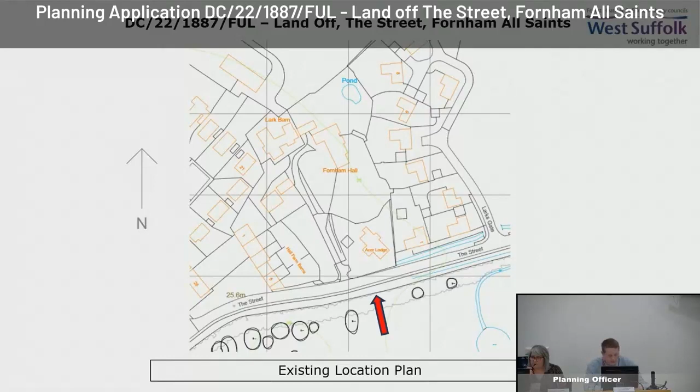This slide shows the location of the access in more detail, particularly in relation to Acer Lodge, which is the bungalow located on the opposite side of the B1106 highway, and the Larks Gate Junction, which is here, and Acer Lodge is here.

The access will be constructed over a drainage ditch using an engineered brick retaining wall. Later within this presentation, I do have a photograph of course, the site, Acer Lodge, and the Larks Gate Junction for context.

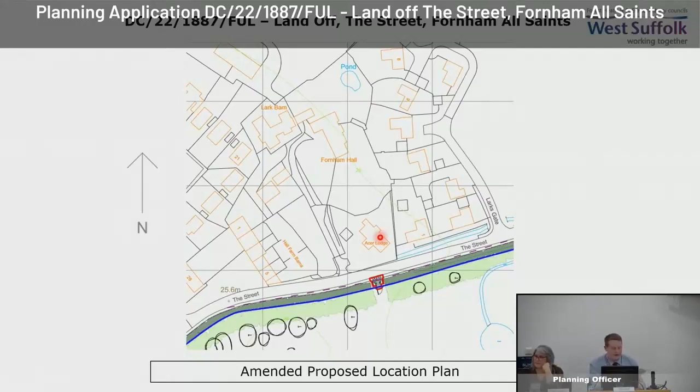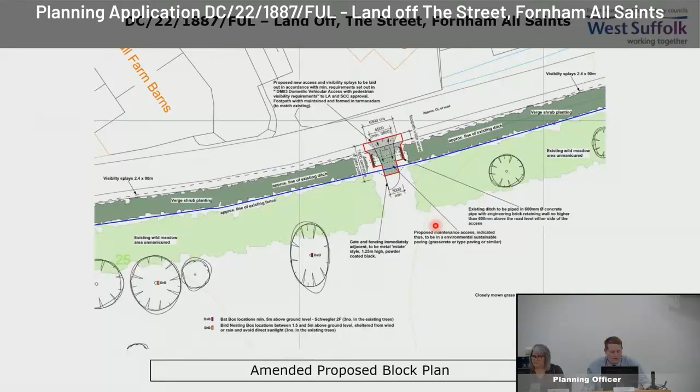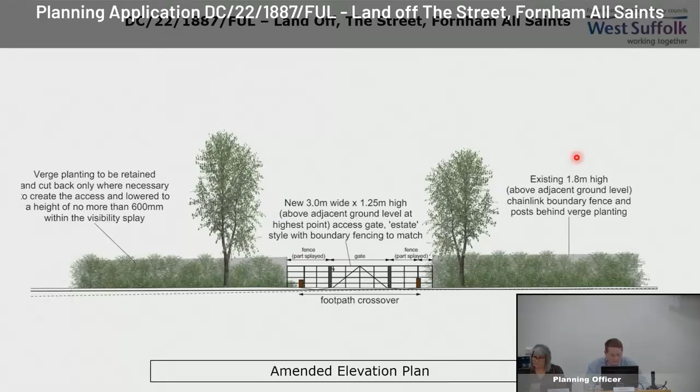Originally, the plans proposed to install matching metal gates and fencing at a height of 1.8 metres. We feel that this amendment is quite a significant improvement and more fitting with the rural character of the area. I also have a photograph of the existing fence later within the presentation.

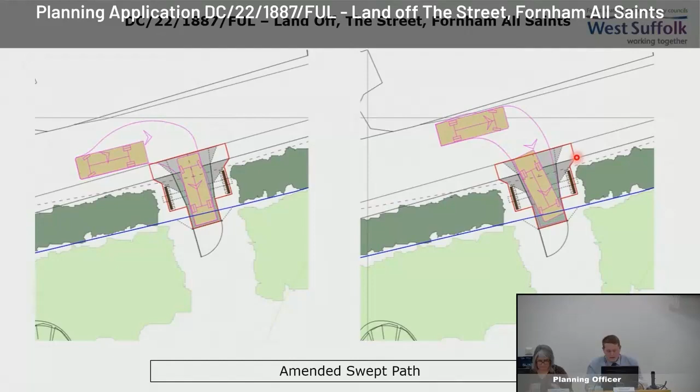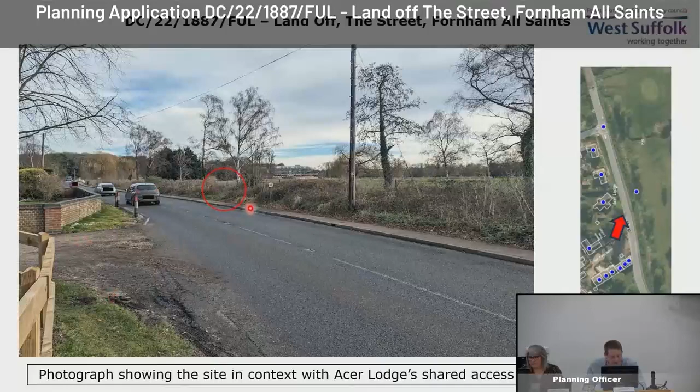This photograph is taken to try and show the site in context with the shared access serving Acer Lodge and other residential properties, and approximately where the access is proposed.

So moving on to consultee comments.

Highways have no objections to this application, subject to conditions which are set out within the report, and they have confirmed within an email that they do not consider that this proposal would result in an adverse risk to highway safety. The Conservation Officer does not object to the amended scheme following the submission of a heritage impact assessment, which demonstrates no harmful impacts upon the conservation area.

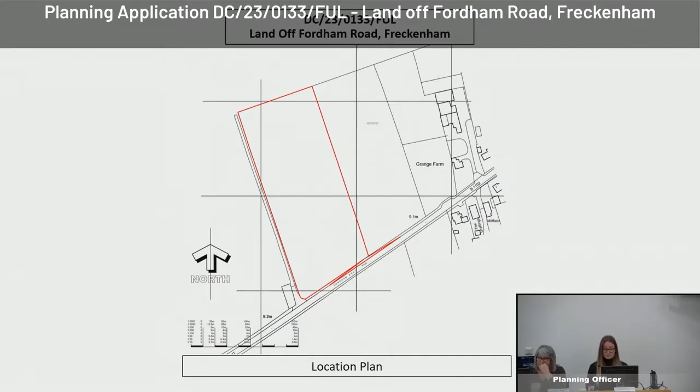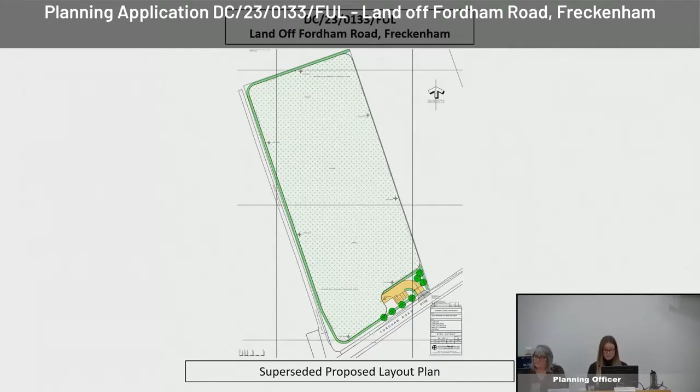And then following the January committee, we have received this amended plan, which now shows hedge planting along the western boundary as well as the north, south and eastern boundaries. We have also had some clarification in terms of the hedging that is proposed.

So it's been confirmed that it would be a native species hedge made up of hornbeam and beech planted in 2 straight rows, set 335 millimetres apart and staggered at a density of 6 plants per linear metre.

It's also been confirmed that the plants are to be open ground stock, 1.2 metre to 1.5 metre high. The beech details growing between 400 to 600 mil a year and the hornbeam between 200 to 400 mil a year.

The applicant has confirmed that they are not proposing any external lighting for the scheme, with use only taking place during daylight hours with a maximum hours of 8 a.m. to 8 p.m. depending on the time of year.

If the application were to be approved, conditions can be added to the permission controlling the hours of use on the site, which is condition 4 within the late paper, as well as not allowing any external lighting to be installed without planning permission being sought, which is condition 5 within the late paper.

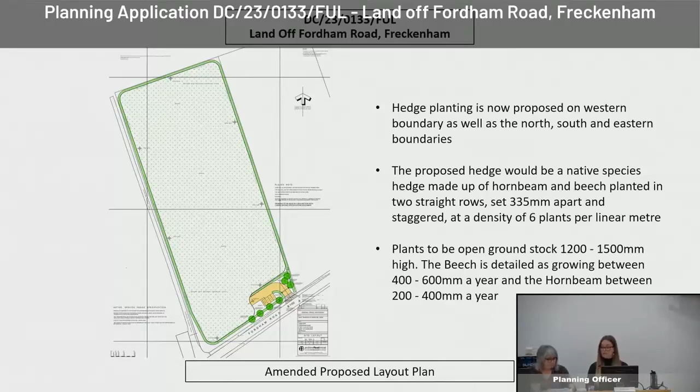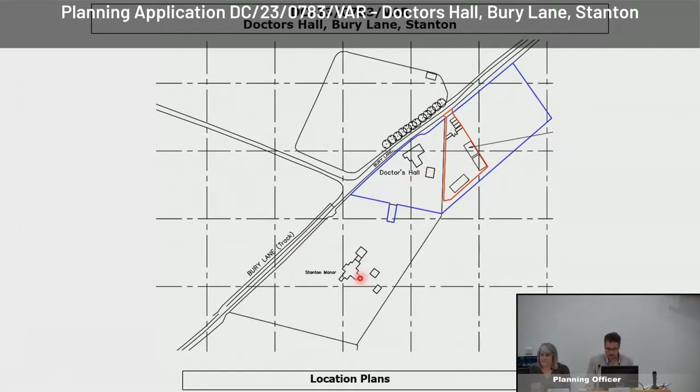And then the site is shown in the red triangle associated with the property at Doctors Hall. Land to the north and the east as paddock is also within the ownership of the applicant. Nearest dwelling is to the south, which is Stanton Manor, highlighted with the laser now.

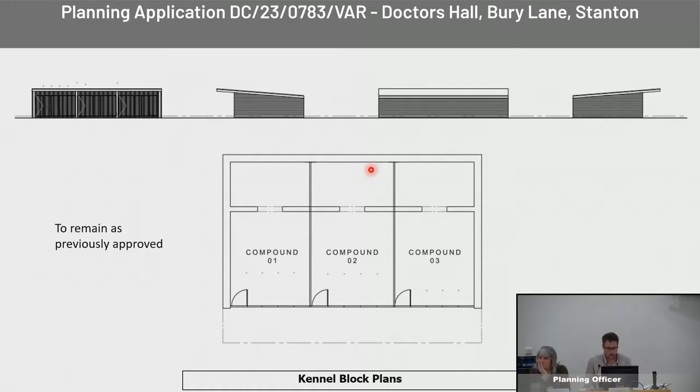This is one of the elevations. Again, members will have seen this on site. This is the kennel block plan, and the amended details as was previously approved for the stable building, and now the alterations to that stable building. Again, the form and position of the building is identical. The only changes are purely elevational.

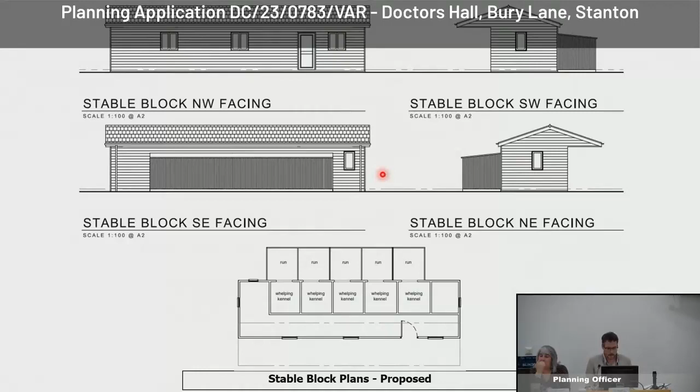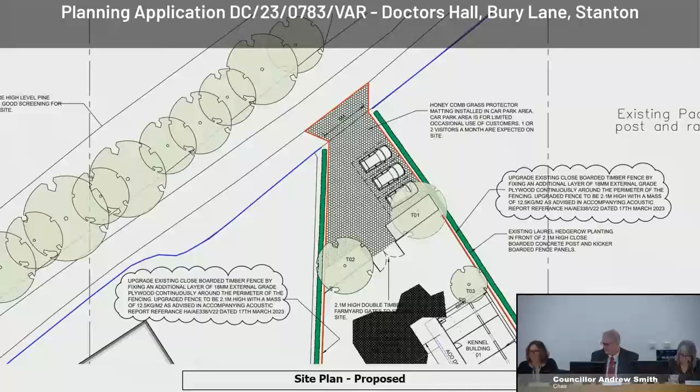And those against, please? And I guess there are abstentions. 2 abstentions. Okay. Oh, Jim's left over here. Jim's gone, yeah.

Thank you, Chair. So that's 10 votes in favour, 2 against, and with 2 abstentions. So the motion is carried and the application is approved. Thank you, everybody. Thank you.

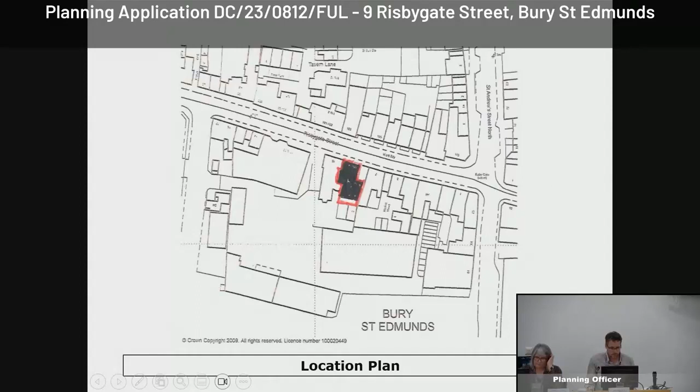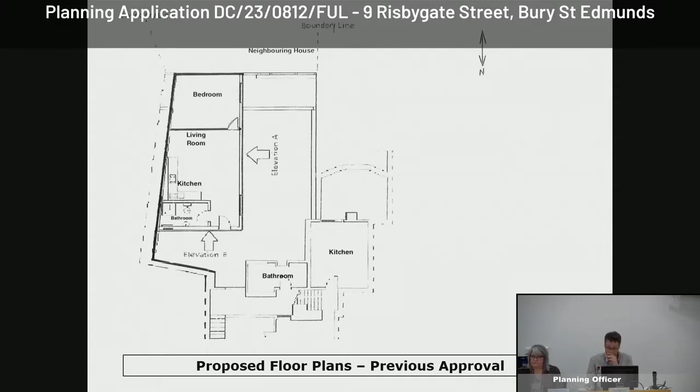Members, of course, will have a good knowledge of this site following the site visit on Monday. But just to talk you through the plans, this is the site outlined in red, located to the south of Risbygate Street. We have first floor plans associated with the previous 2019, now no longer extant, approval, which shows the one-bedroom flat at first floor level, accessed out of an external door across the flat roof and back in. This is all of current flat roof ground floor restaurant extension that was built around 5 years ago.

This gives you a better indication of that existing and current arrangement. This is the flat-roofed ground floor restaurant extension, which members who were on site will note is not visible in the slightest from outside of the site, because the site is surrounded by a relatively high wall and was therefore considered acceptable in heritage terms when it was approved and built.

What we can see on the right-hand side is the previous approval, no longer extant, but from 2020, for the one-bedroomed flatted accommodation with a pitched roof, reflecting, if not completely matching, the existing arrangement of gables and pitched roofs on the rear of the building.

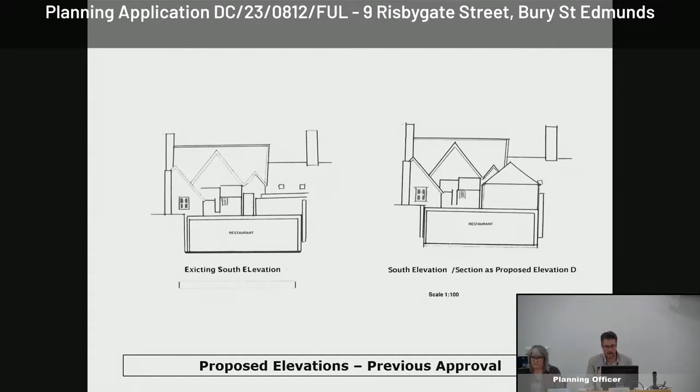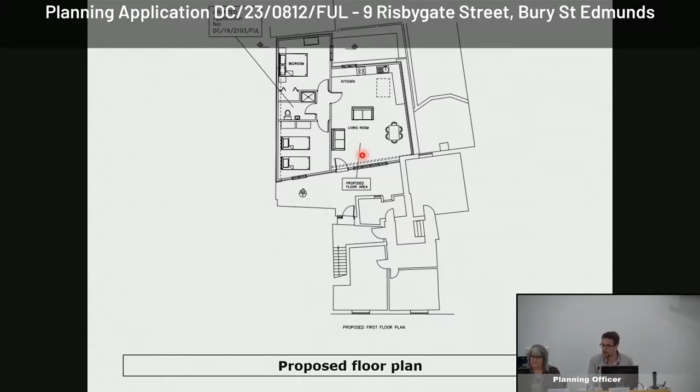We have this element on the left-hand side of the flat-roofed area, as we see on this plan, which includes the area that which was previously containing the single-bedroom flat, and now we have this additional element on the other section of the flat roof, which now proposes in totality a larger unit of accommodation, 2 bedrooms. It is proposed as manager's accommodation for the owner of the business to occupy.

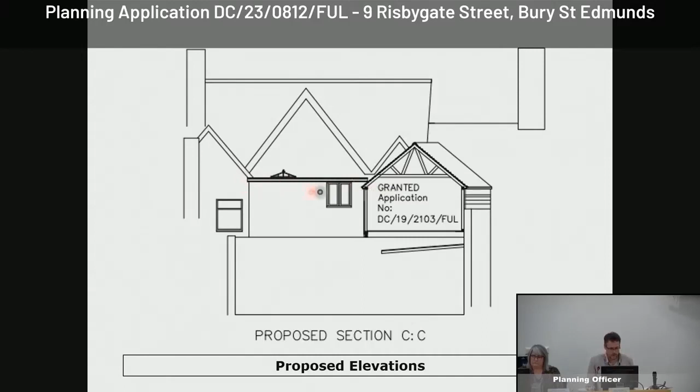So these are now the current proposed rear elevations. We have the section of that pitched roof element, which had previously obtained planning permission, albeit has not been implemented. And we now also see the current proposed extension to that element, which is the flat-roofed section within the centre of the site.

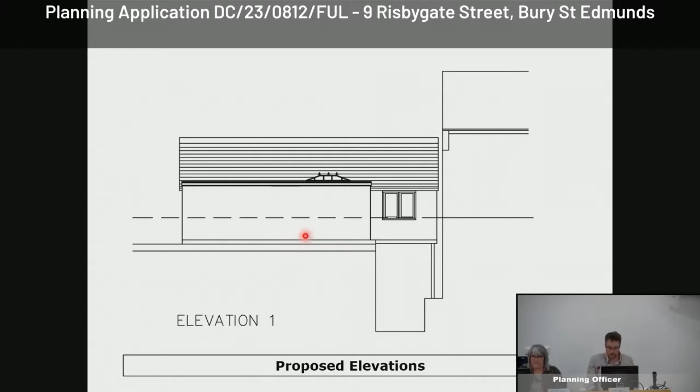The next plan shows an elevation of the neighbouring dwelling. Members will see it beyond the rear wall of the restaurant business. This is the pitched roof element, which is identical to that which was previously approved. And this is the fairly deep flat roofed element, which at first floor level, in effect, creates the impression of a two-storey flat roof extension to the rear of the listed building.

We have one further elevation, taken or shown positioned immediately behind the building itself. If members can imagine where the extract flue was positioned, this is an elevation looking out towards the rear of the site, which shows the pitched roof first floor extension, identical to that which was previously approved, and then of course the flat roof side element to the right hand side.

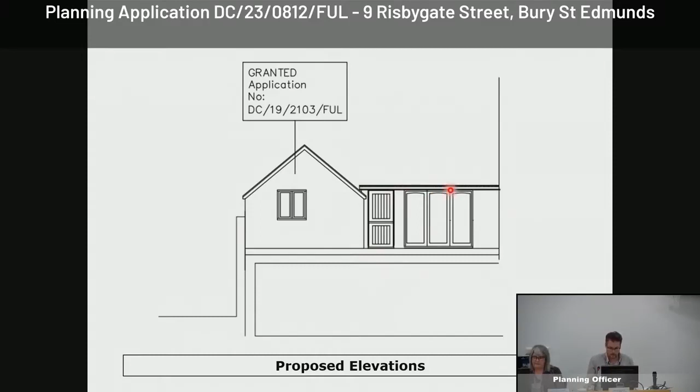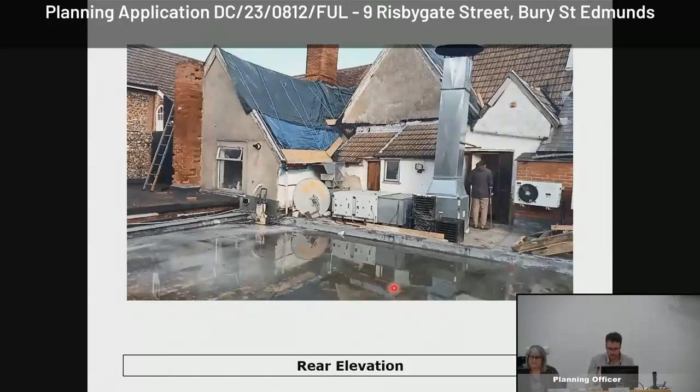I have a site video. It just pans round from the car park and shows the building itself and then the dwelling on the right hand side. And then there is also a video from the flat roof itself.

We can see the very small rear courtyard behind the flat roofed ground floor restaurant extension, again subservient to the scale of the wall. That's the gable end of the neighbouring dwelling. And then we pan round further to show the rear of the existing listed building, and then the retaining wall on the right hand side.

Just in this position here, if members can see, these 2 would appear to be air conditioning units. The pitched roof element of the structure will be positioned in this location, with the flat roofed element over to the left hand side.

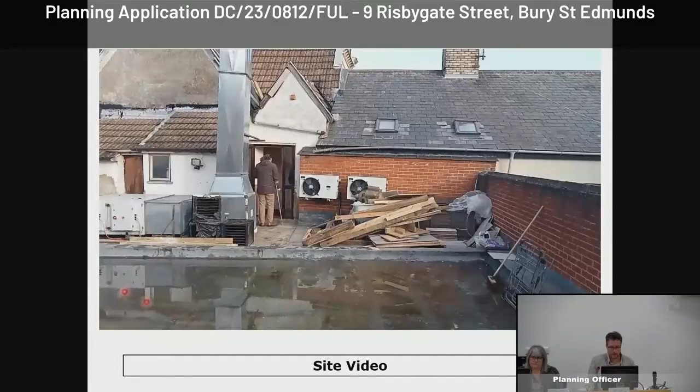In terms of wider comments received in relation to this application, I've summarised the latest comments received from the Georgian Society. Again, we have comments from the Conservation Officer that consider them unable to support what in effect is a 2-storey flat roof extension to the rear of the property.

This raises concerns in relation to the listed building due to its inappropriate design, which fails to relate to the dual pitch roofs of the host building.

The NPPF makes it clear that any harm to or loss of the significance of a designated heritage asset from either its alteration or its destruction, or from development within its setting, should require a clear and convincing justification.

There has been consent granted previously for a unit of manager's accommodation at the property. This is no longer extant, but it was approved as recently as 2020, and it's reasonable to assume that permission would again be granted if it were to be applied for, noting the very recent nature of that approval.